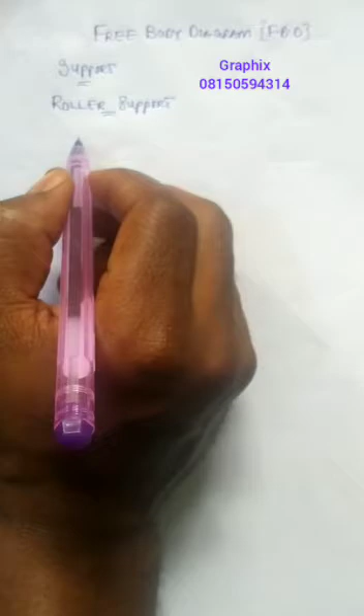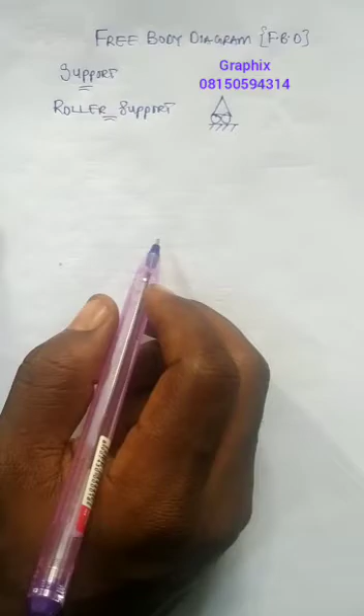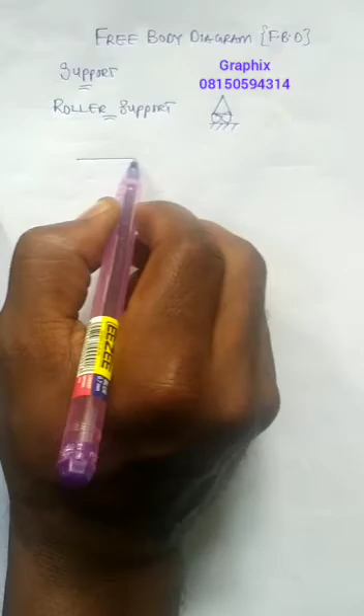Now the symbol for roller support is this. When you see this, it is the symbol for what? Roller support. Are we good? Now a roller support always has one reaction. For instance, let us consider a beam. Let's say this is a beam here, right? This is A and this is B. The beginning of the beam is A, the end of the beam is B.

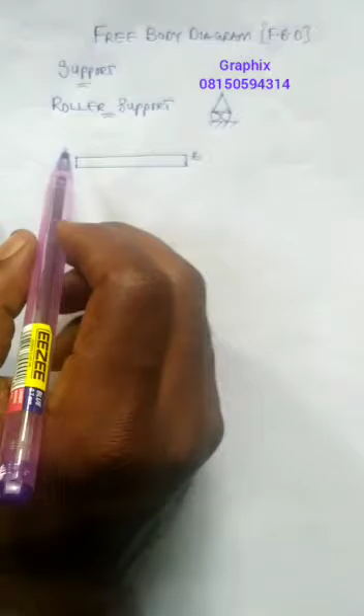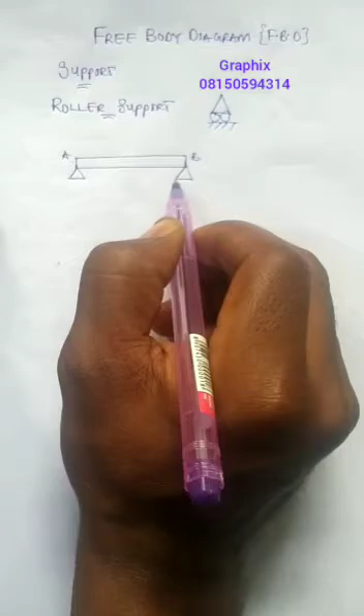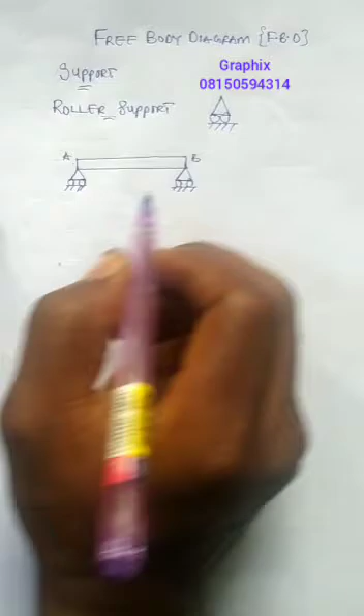Now what is a beam? A beam is a structural member that is designed to resist load acting at right angle to its what? Longitudinal axis, right? Now let's say a support is carrying the beam, and let's assume that support is this roller support, right? And let's assume that on that beam there is a load. Let me say a block on it, right?

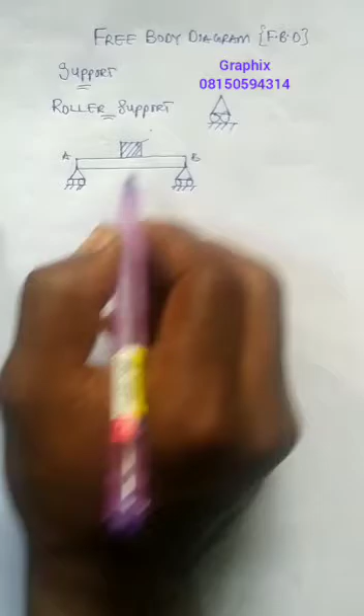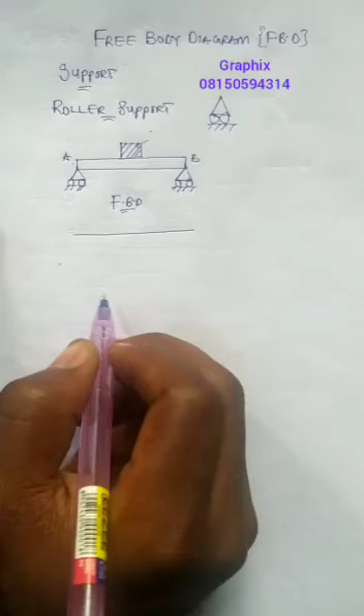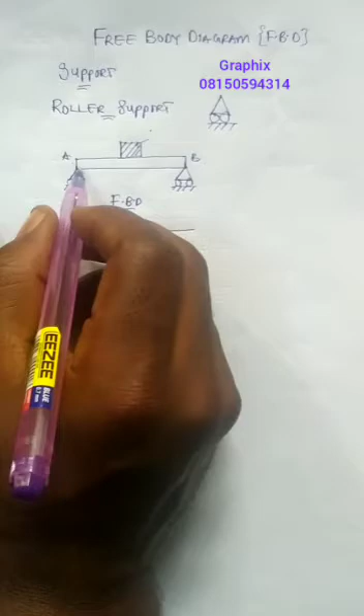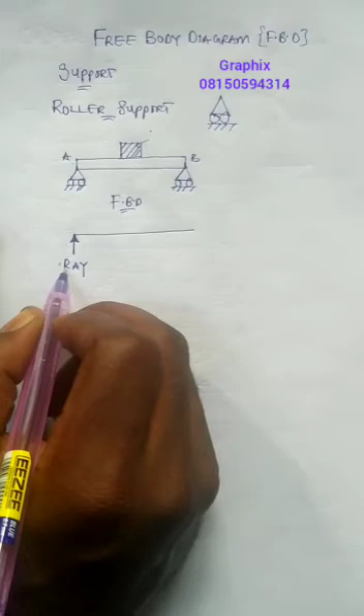Now if I want to draw my free body diagram of this, it means that I will draw a straight line. Since this is a roller support, just like your car tire, my car can easily go on the ground, but it cannot climb up a wall. So in the direction it cannot go, it will have one reaction facing up. So we call it RAY. RAY means the reaction at point A along the y-axis, right? And this point will be RBY. This is the reaction at point B along the y-axis, right?

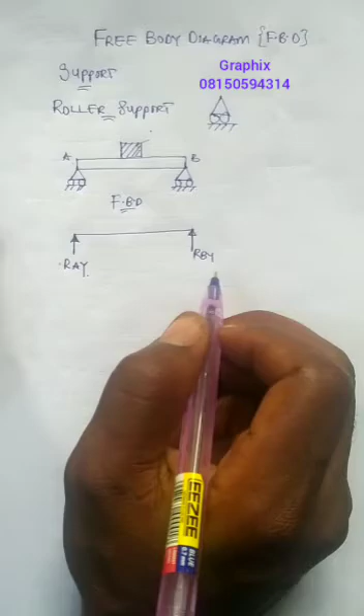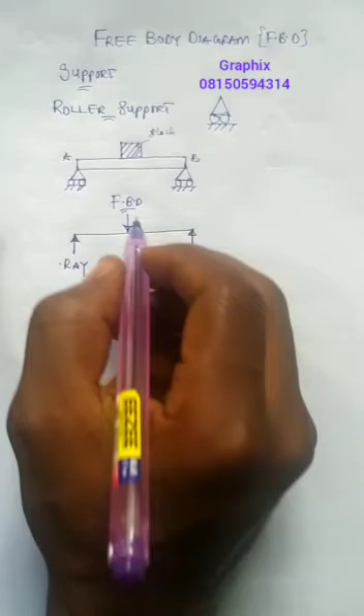Now this block here has a load, so it's a weight, so it will be acting downward because it will be exerting pressure, right? So this we call W. So this is the free body diagram of this system. Are we good now?

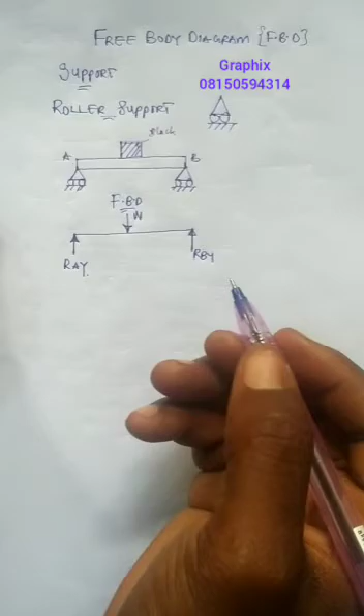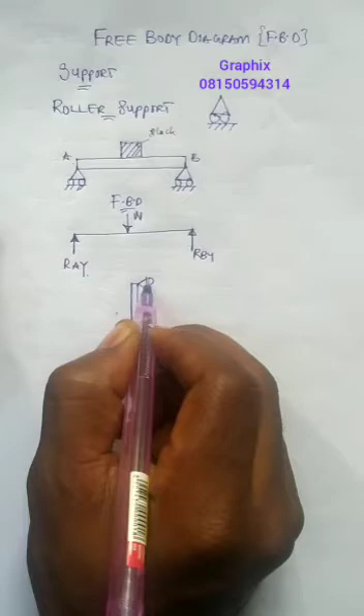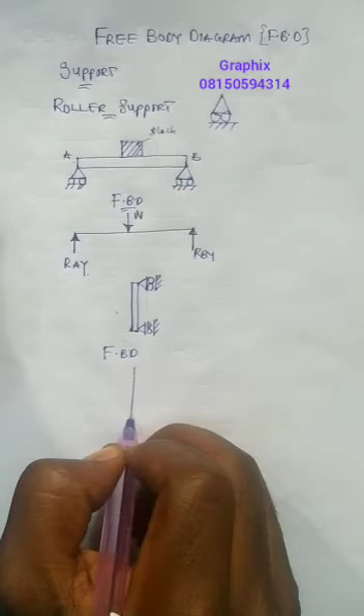Now similarly, let's assume maybe the beam is like this, and the reactions and the load are like this. Now if I want to draw the free body diagram, FBD, here, it will be something like this. Maybe this is my point A and this is my point B. So we'll have a reaction facing this direction. So this will be RAX because this is the horizontal component, and this will be RBX, reaction along the x-axis.

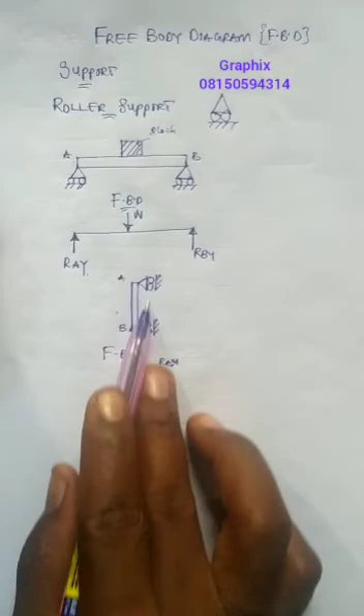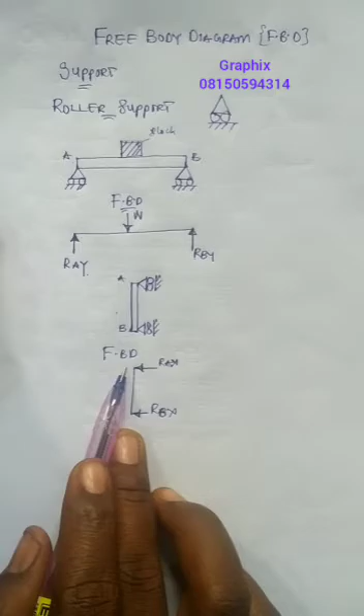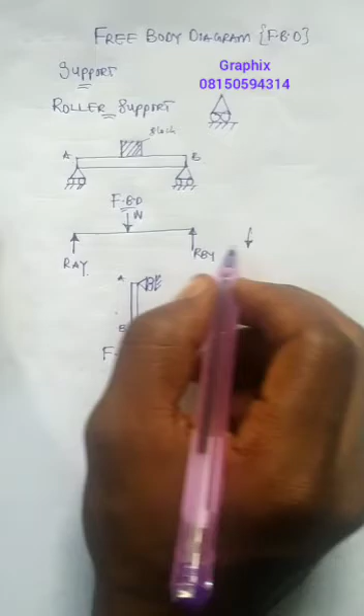So one thing to understand is the movement. Movement is easier vertically here, but movement is not easier horizontally here. To show that there's no movement in the horizontal direction, but there's movement in the vertical direction, I'm having a reaction here. One thing you need to understand is that your load will face downward, and your reaction will never face downward. It will always face what? Upward. And your reaction will never be negative. That is one thing you need to understand.

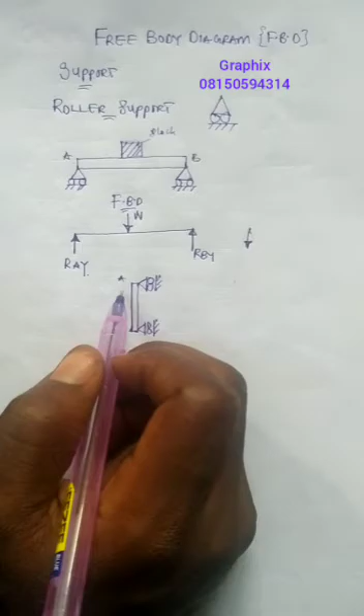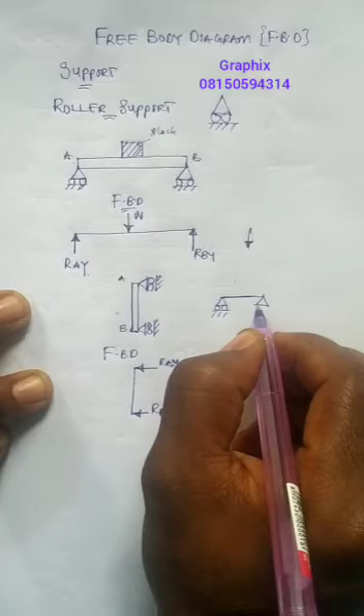And also, when I'm talking about reaction and so on, what you need to understand is, if I have a chair, let's say this is my chair, right? I have a chair here that has this load, and someone is standing on the chair. The person has a weight, and that weight is a load. So since it's a load, it is the action force, right? Now the support is trying to carry the load, so it is what?

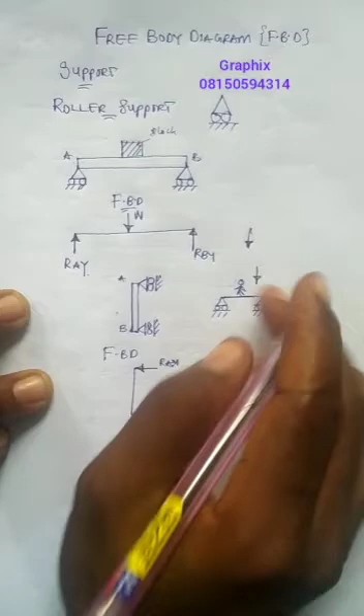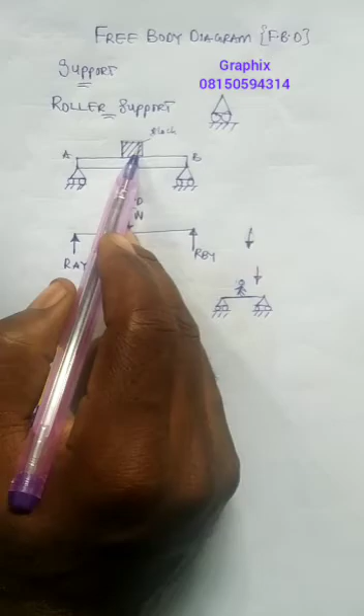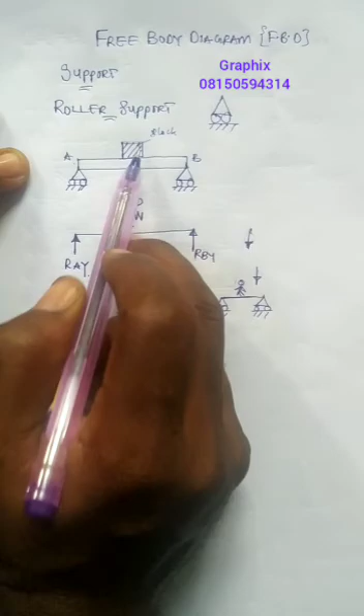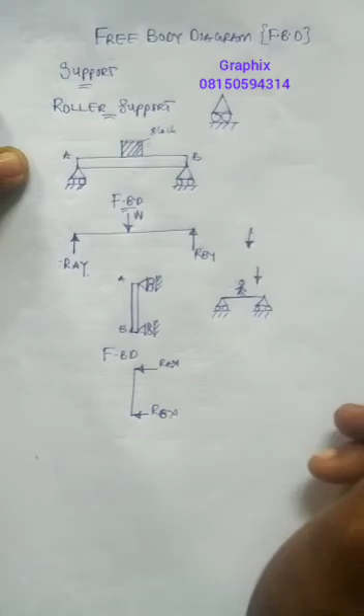The reaction force. So that's why in this case here, this block is the action force, because it is adding weight to this beam, right? It is a load. While the supports here are what they call the reaction force. They stop this load from having too much effect on the beam. So the block is the action force, which we'll call the weight, and the support is the reaction force, which we'll call the reaction in the free body diagram. Are we good now?